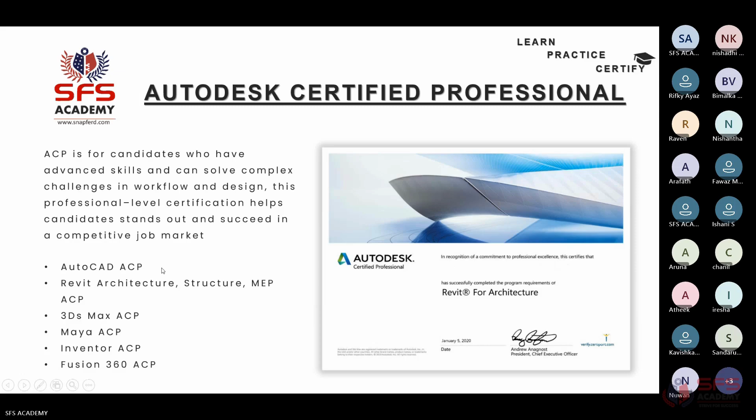We are conducting Autodesk related software and NVQ programs, project management software, and also industry specific programs - SolidWorks, 3D printing, and all these software. Your part, the MEP QS, is also under the industry specific programs we conduct here.

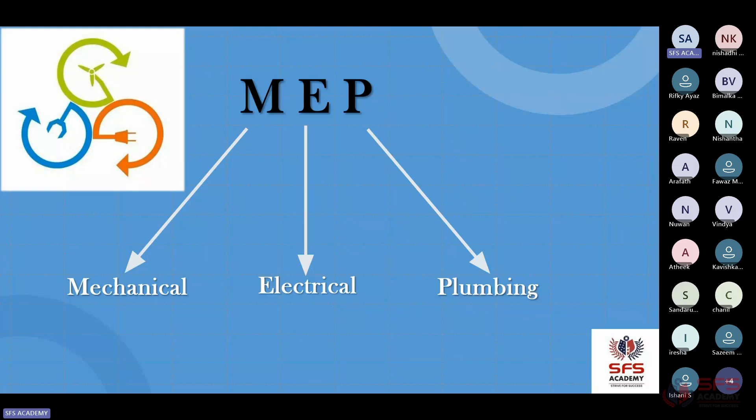Okay, we'll move to the mechanical part. In this mechanical part, basically the basic part is the air conditioning unit. In our house or working place, we use air conditioning units. If it's a small scale project, you all have seen the AC units. But if you're working in a high scale project, like a factory or any high scale project, you might have seen different mechanical services used - it may be VRV systems. VRV means variable refrigerant volume systems.

In Sri Lanka, most banks use this VRV system. If you deeply check their AC providing system, you might get an idea about this VRV system. However, if it's a high scale project, we have to go with some other services - meaning AC unit is not enough, VRV also not enough. So we have to search for an alternative option to provide cooling to the complete building. If it's a large scale project, AC unit is not enough.

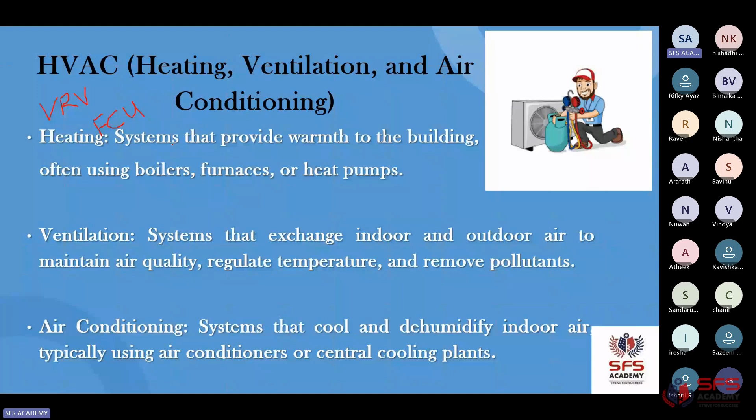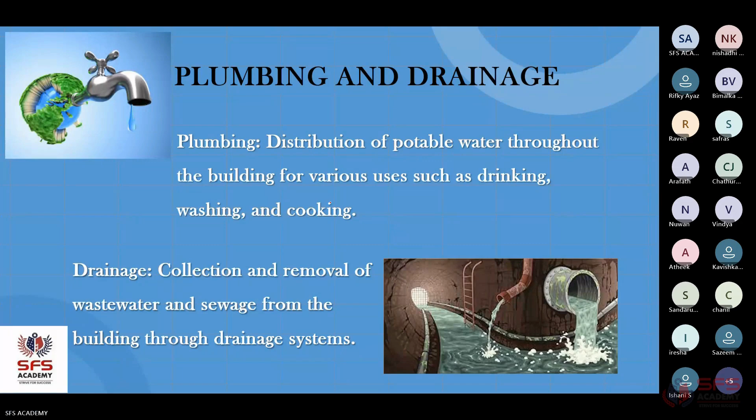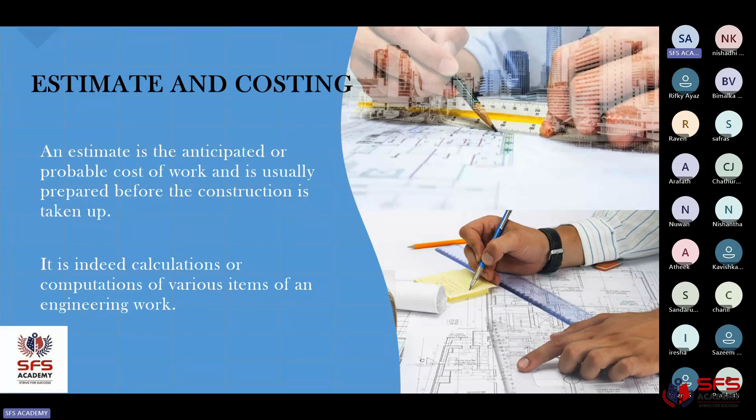And then, QS connect or maybe a MEPQS, they have to involve in the tender procedure as well. They should know about the tender procedure or the tender process.

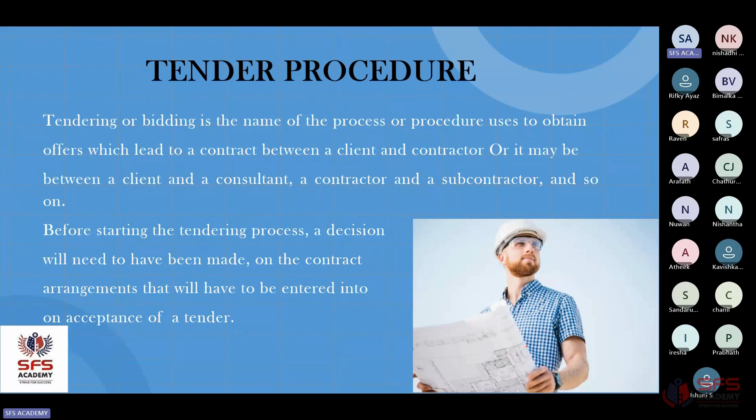Now we'll discuss what are the duties and the responsibilities of a MEP QS or a QS. Whatever the duties and responsibilities, MEP QS connected, QS connected, my duties and responsibilities are the same, similar. Most of the time it's the same, only small changes are there.

So as I said in the beginning, as a QS, you will have to involve from the beginning of the project to the end of the day. From the day the project starts until the final day, a QS must necessarily be involved.

Same like that, even the MEP QS, sometimes they don't want to involve much in the beginning of the project, but in between all the stages, if you are a civil engineer who has also followed MEP QS, then you have dual qualification, dual roles to perform. That means starting from the construction works, you have to involve in the MEP works. And in the final part, QS part also, you have to do supervision and the alterations, whatever variations are made to the project, you have to be there.

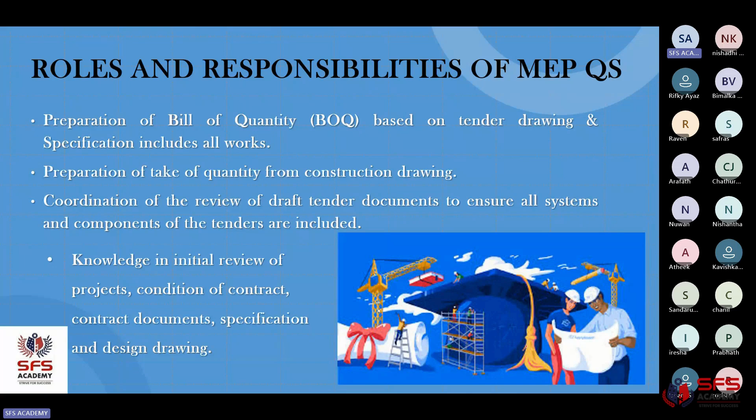The documentation side also there, they have to handle the documents, and costing part they have to handle, estimation. There are so many, it's a wide range of responsibilities for each and every part. As a QS, as a MEP QS, you all have to involve that is not only the cost relevant things, not only preparing BOQs and coordinating these things, but even though you have to attend some important meetings with the contractors or subcontractors or client, or sometimes some other external peoples, right? You have to check about the quotations for the services we are providing, right? So likewise, negotiations or whatever the variations you have to involve when it comes to construction.

Sometimes client may change the concept, client may change the scope of the work, then as a QS or as a MEP QS, you are again involved in this, and you have to check about the cost variations or other things, time consumption for these extra works and all. These things as a MEP QS or as a QS, you have to handle.